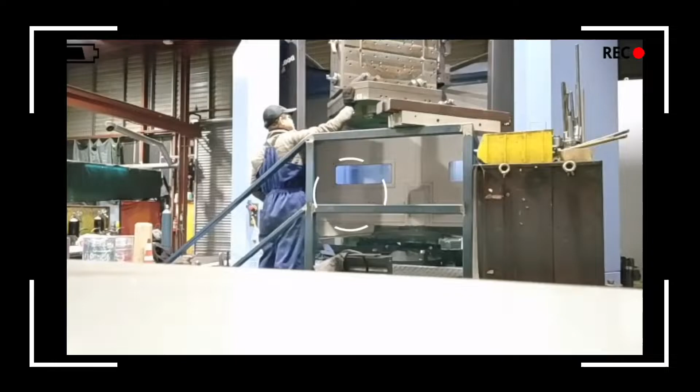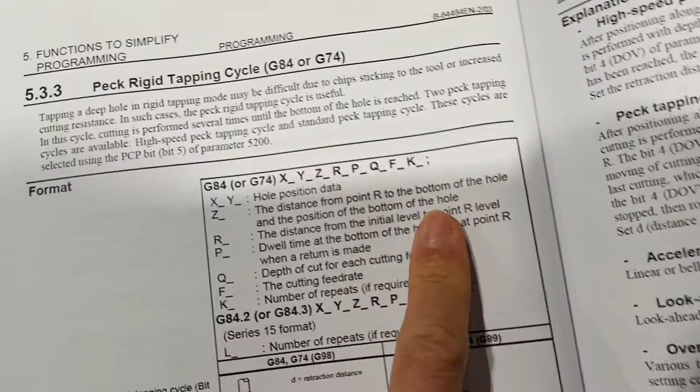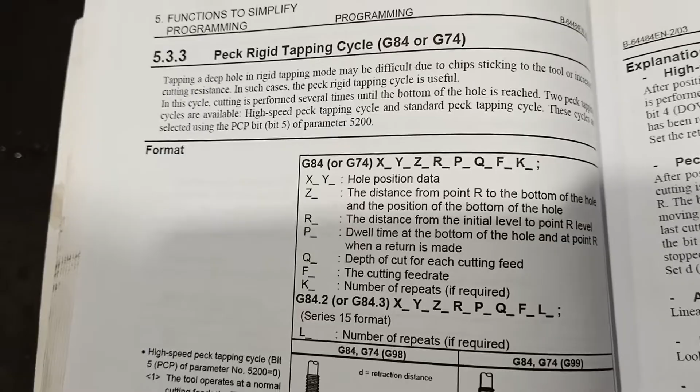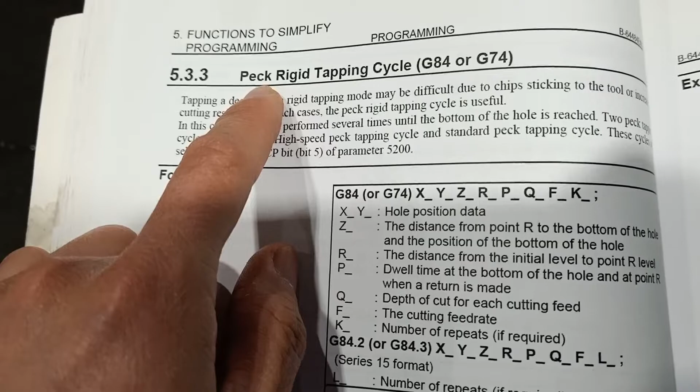Guys, another important parameter that you should set on your machine when you are doing a tapping operation, especially if you are making deep hole tapping. It is advisable that you set your peck rigid tapping cycle, and change parameter 5200, the PCP bit number 5. It depends on your machine.

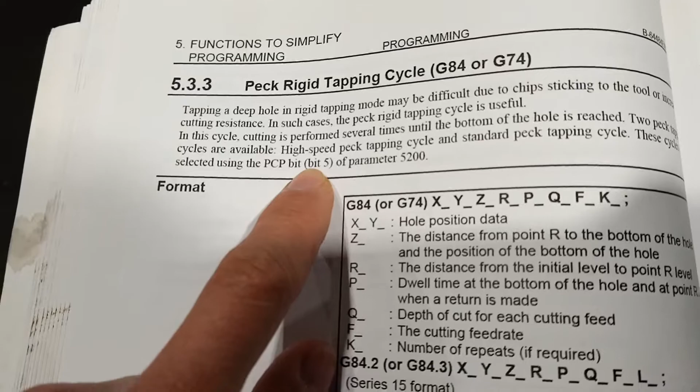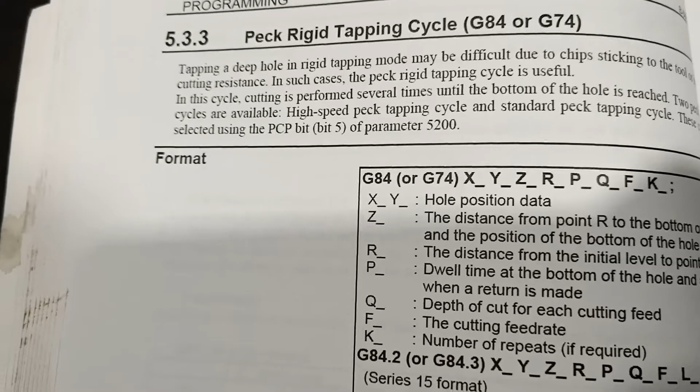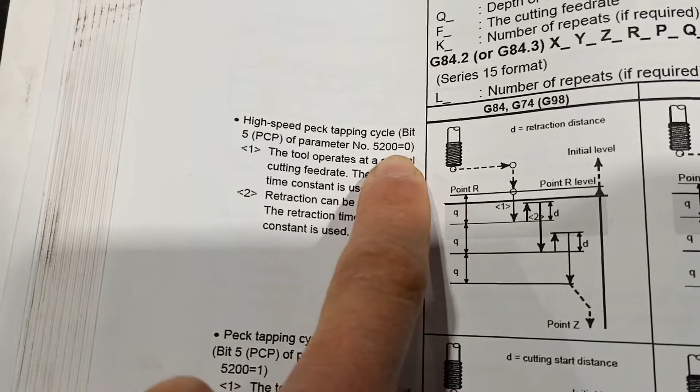This machine is the NHP 8000 horizontal mill. I will change the PCP to 1 because at the moment it is set to 0. High speed peck tapping cycle with bit 5 PCP of parameter number 5200. At the moment it is set to 0, and I will show you the difference if you set it to 1.

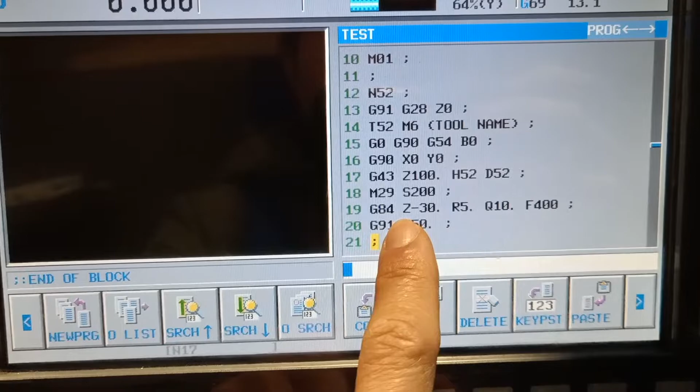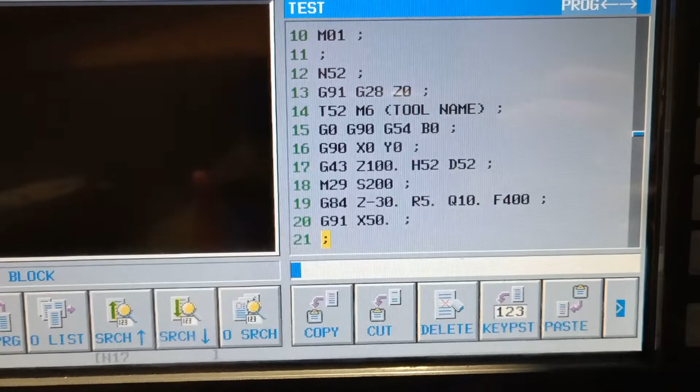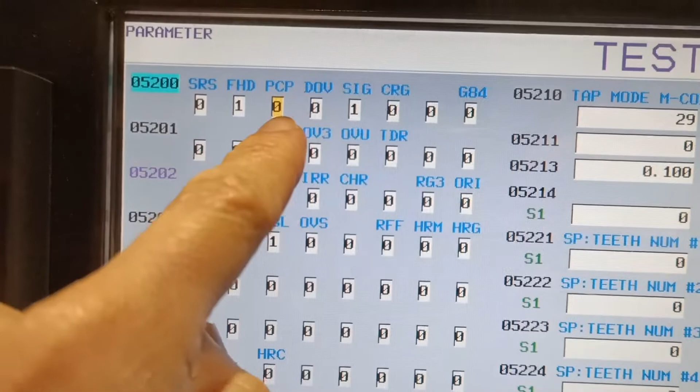I have a simple program. This one is M16. I put Q, which is my depth of cut for every peck of my tapping. At the moment my PCP is set to 0, and I will show you what is going to happen if it is set to 0 and I have Q.

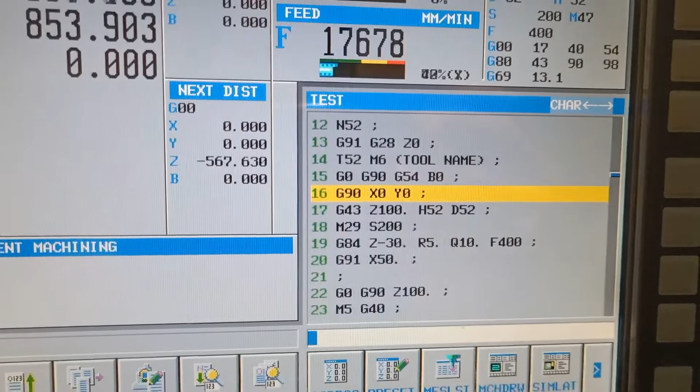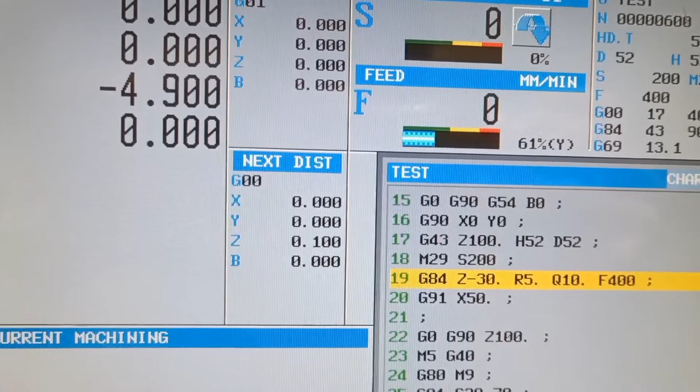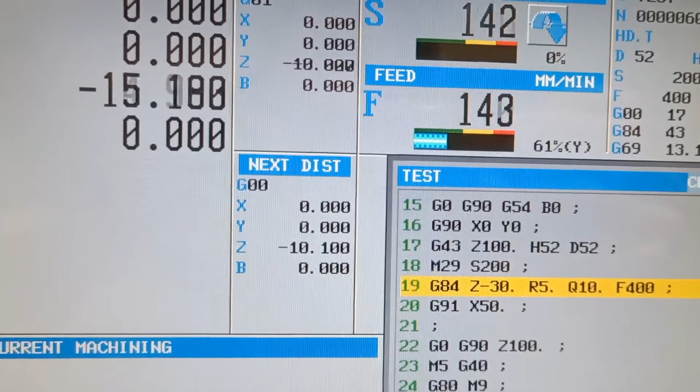So let's do it. I'm going to start this sample tapping program and see what happens. I will put it on single block, position to R5, cut to -5. As you can see, it doesn't go back to the retract position, which is R5. Stop, go back just 0.1, another 10 mil, and cut the final depth.

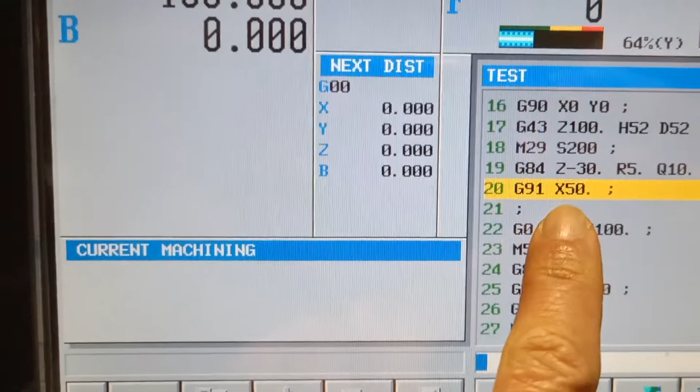I'm going to do the second hole position, and let's see how it works on the machine. As you can see, it just stops and continues to cut the thread.

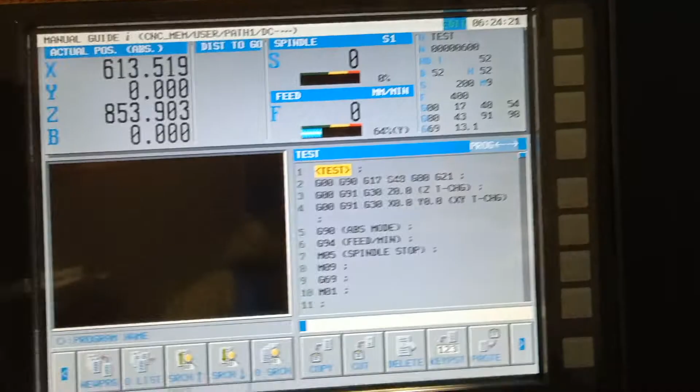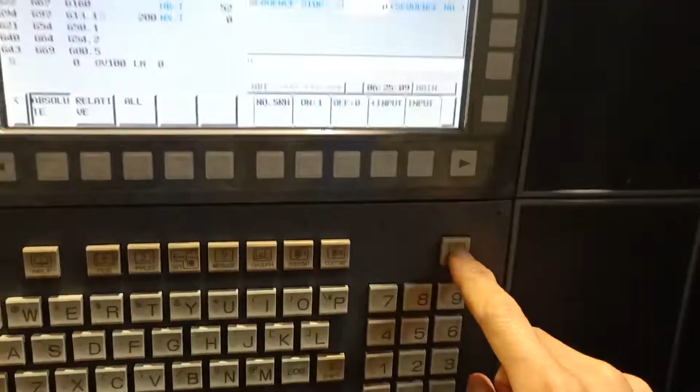To change your parameter, you should be in MDI and offset setting, and you need to set parameter write to 1 first, then input and execute. Now it changed to 1. Then go to system, then parameter, and I will change the PCP to 1. So 1, then input again, and it will change to 1.

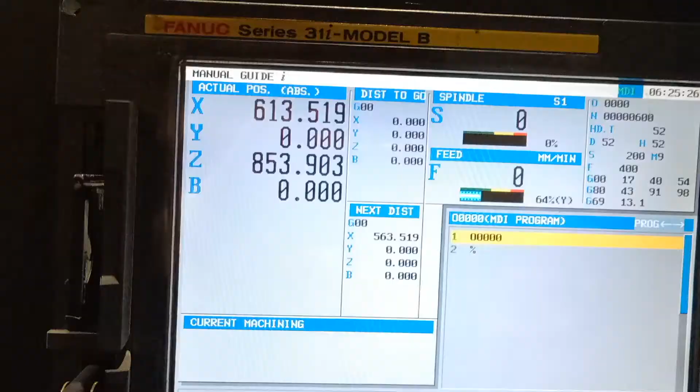Then go back again to your program, and let's see how this one is going to work. If you are doing deep hole tapping, I think this is your best option. As you can see, it's going up again to your R position. Make it close.

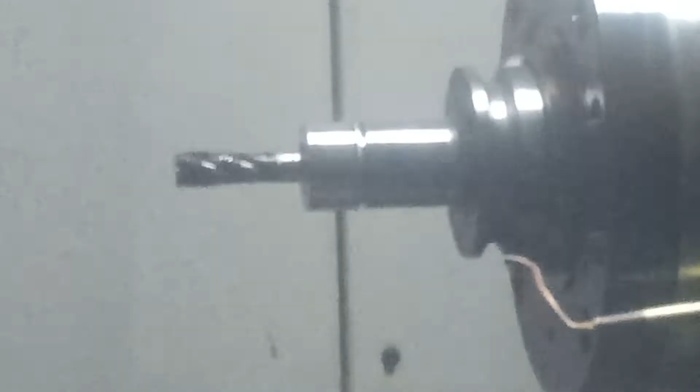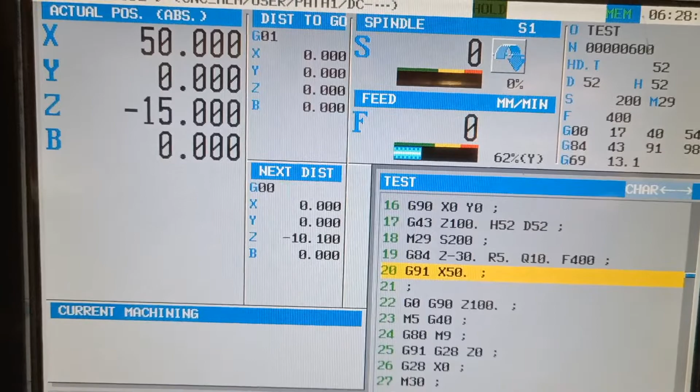Then it will jump to the second hole, X50, go back to our R position, cut to -5, and go back again to our R position. It will stop 0.1 before the last cut, went to 15, go back again to our R position.

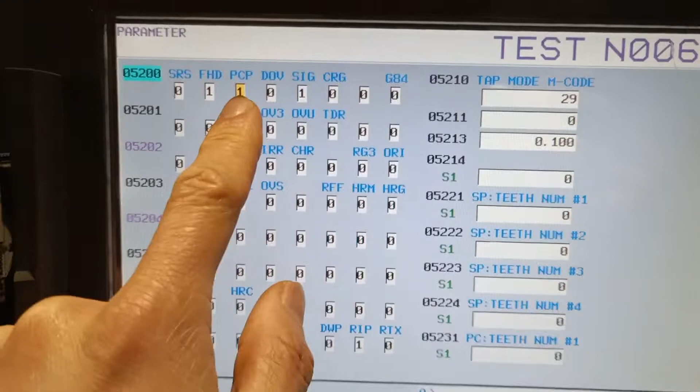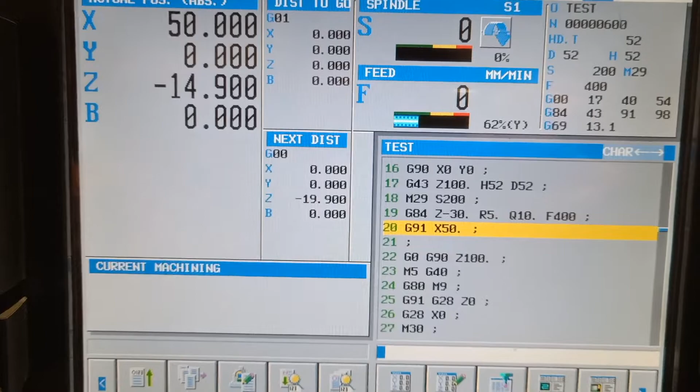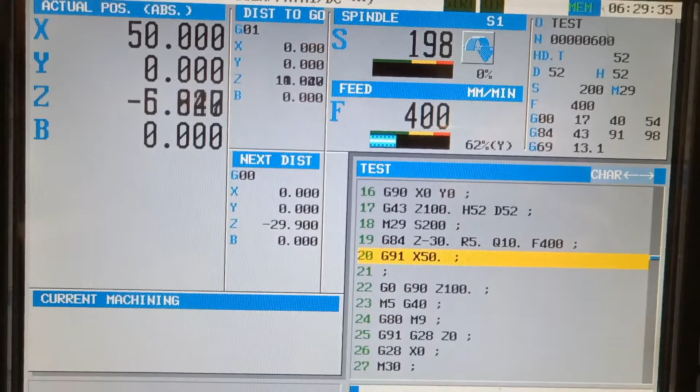If you set this one to 1, you are not going to break your tap, because by retracting to our R position you can clear the swarf. By doing peck rigid tapping, you only have short swarf. It will clear from your tapping tool until it reaches the final depth, which is -30.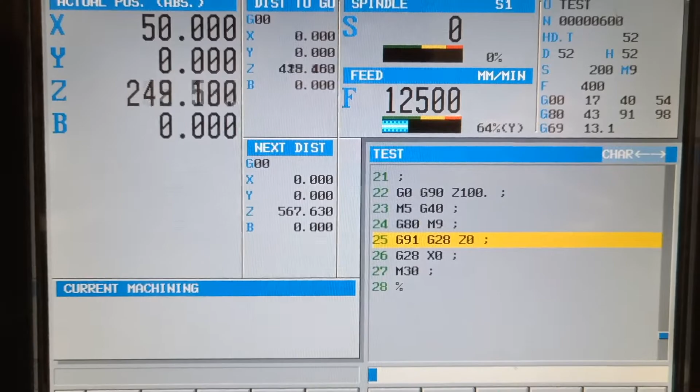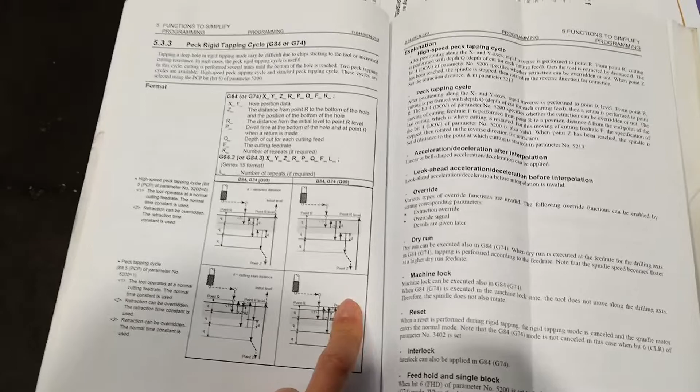Alright, so it's all done. I hope you learned something. This one is a very important parameter. You can get your machine's book and read all of this. If you want to change some of these parameters, you can, but for me this one is very important.